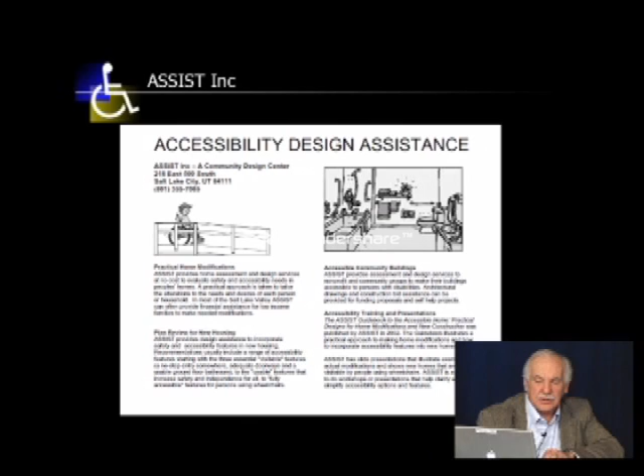We're in downtown Salt Lake. We run a number of programs. This is a description of our Accessibility Design Assistance Program, the Practical Home Modifications Plan Review for New Housing, consultation on community buildings, and trainings and presentations such as we're doing today. The other side of the flyer is in Spanish.

These are the building blocks that I think everyone should really be aware of if they're working to provide modification advice for people with disabilities. As probably most of you know, the standard code and safety require a foot of ramp for each inch of rise. So if you're up 24 inches to your front door sill, to your door threshold, you'll need 24 feet of ramp plus landing.

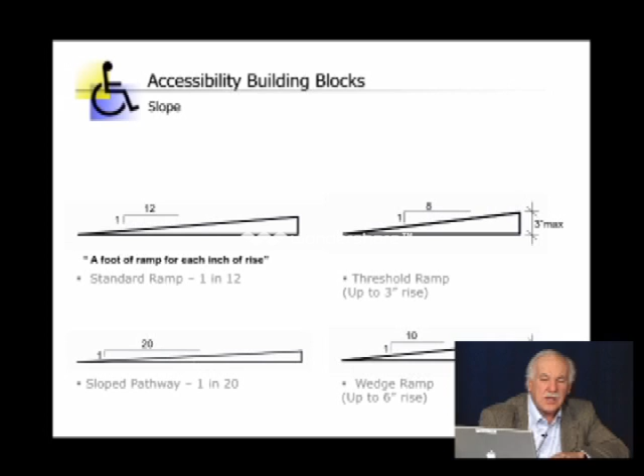There are situations where the rise is only 3 inches, where someone can manage a slightly steeper slope. And ideally, if you can do a 1 in 20 slope pathway, code doesn't require railings, and it's better for everybody, because there are some people that can't even do the 1 in 12. But that's probably the most important ratio to remember.

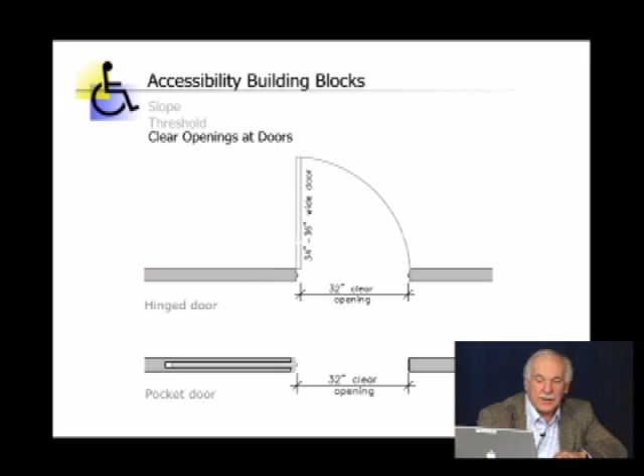It also relates to thresholds. For accessibility, a 1/4 inch maximum vertical, or a 1/2 inch with a beveled slope. Doorways require a 32-inch clear opening, and a regularly hinged door would have to be 34 to 36 inches wide to get that 32-inch clear opening. But more on that later that Melissa will show you.

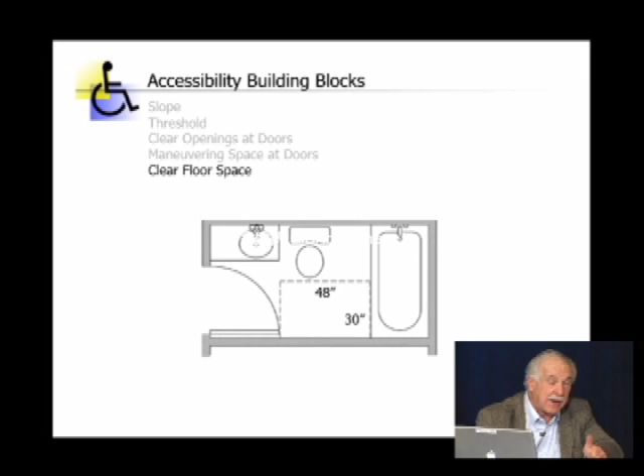These are just maneuvering spaces at doors so that you are out of the way as you swing the door open. These next two slides are really the most important dimensions, other than the ramp, that I think people need to know. Most people in a wheelchair occupy a clear floor space of 30 by 48 inches. A usable standard requires that clear floor space be by each fixture, each bathroom fixture, each kitchen fixture. A greater level of accessibility, you're probably familiar with as well, is the 60-inch diameter circle.

That is called the wheelchair turning space. The clear floor space is for when someone has to go in and back out because they might not be able to turn around. The 60-inch diameter allows you to make the full turnaround.

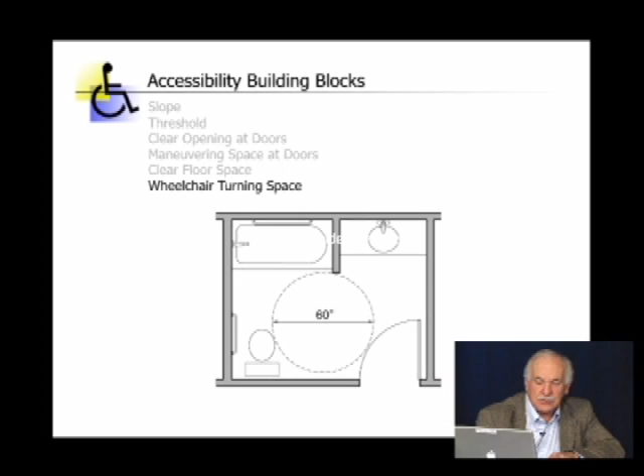Grab bar reinforcement - we're encouraging builders to put this in every home. A line of 2x10s reinforcing the wall around tubs and behind toilets. And while you're at it, bring it further so the towel bars can actually be built as grab bars. You can add grab bars that serve as towel bars along the long wall of the bathroom.

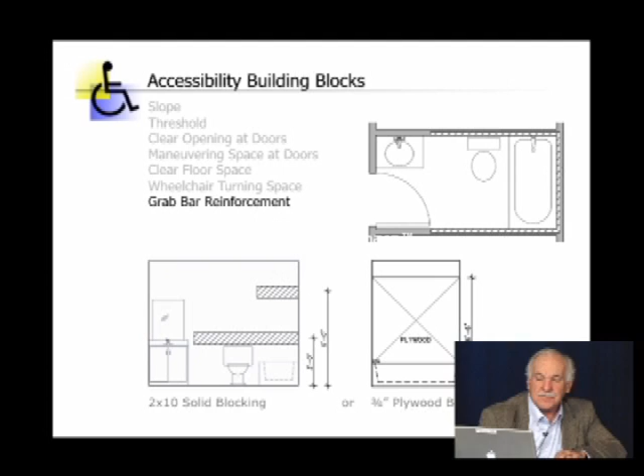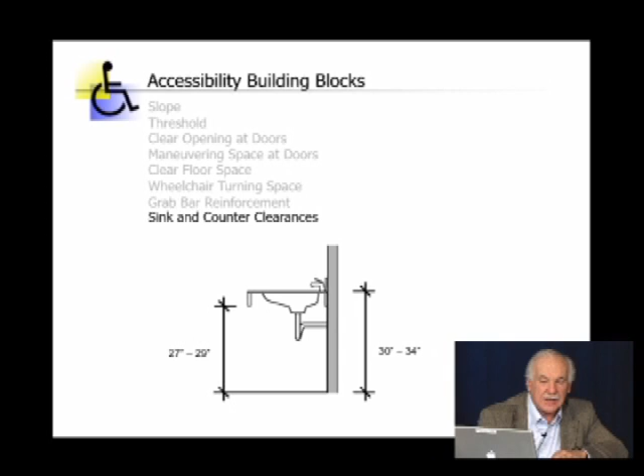Counters would typically be lower for someone in a wheelchair, and the knee space would provide 27 to 29 inches for most people in wheelchairs. Again, it has to be tailored to the particular people, and sometimes they're in a taller chair or there's a joystick that has to be accommodated. So just going to the code is not good enough.

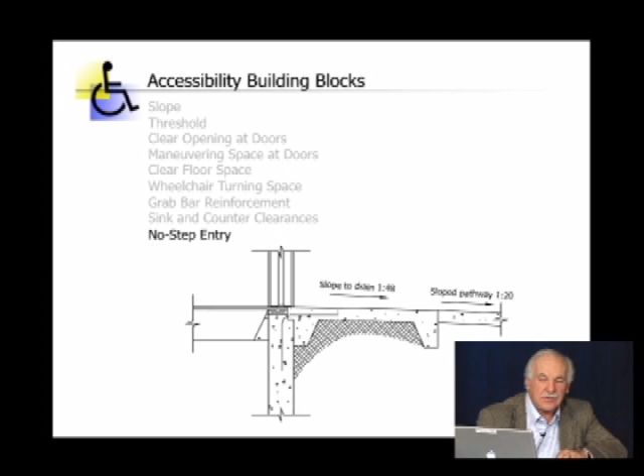And lastly, for the building blocks, I add this no-step entry framing. For those of you who know construction, this is probably the most important detail to create basic access in homes. We have more detail on this, but in talking to builders, it's a very critical piece.

And just to reiterate once again, the usable standard 30 by 48 clear floor space provides use or transfer of all fixtures, appliances, and counter, and the 60-inch diameter wheelchair turning space creates even more maneuverability.

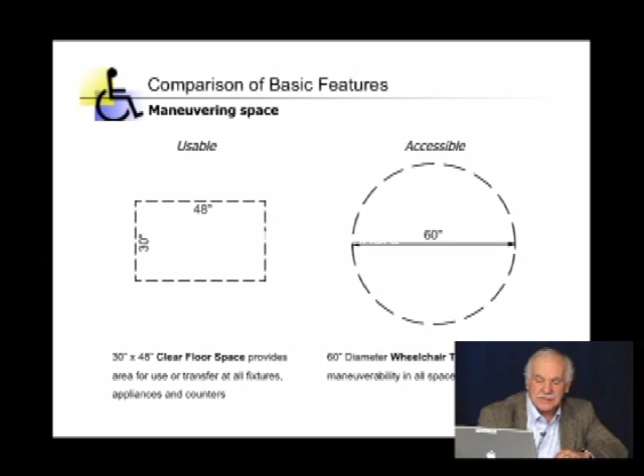And I'm going to turn it over to Melissa to start with the most basic access, which is entry into the home. The reason we start with basic access is that's usually the hardest problem to solve. After that come bathrooms, and we look at interior passageways through the home, and finally get into kitchens. So those are the four areas I'll be covering.

So we're going to start with ramps, because that's usually the first thing people think of about how to get someone in a chair into the house.

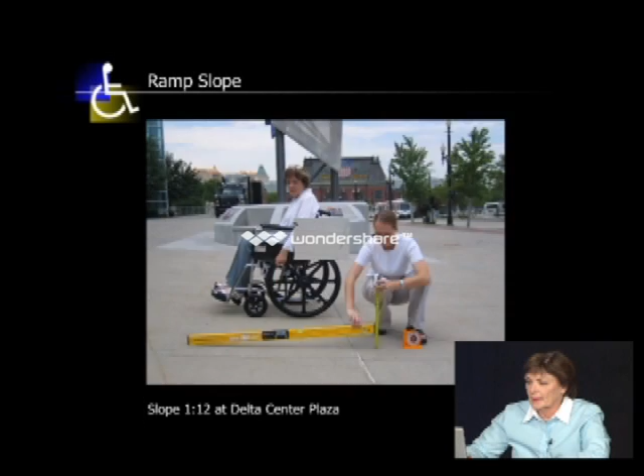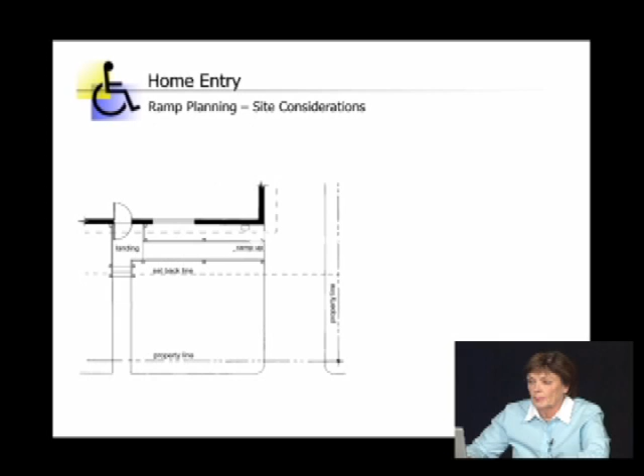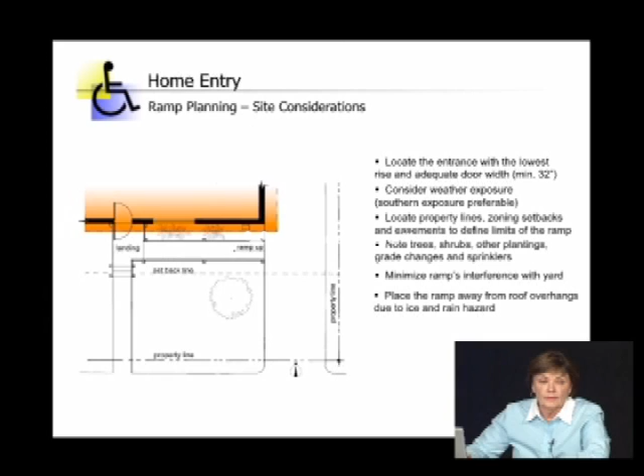So when we get to needing a ramp, the first thing is to figure out where it's going to be - where is there enough room, how long the ramp has to be. This just gives you, first we take a look at if it's going to be at the front door, what some of the considerations are, and I won't read all these. Just keep in mind setbacks, hose bibs, sprinkler systems - we sometimes forget about the sprinkler systems. So these are all things to be taken into account when you're thinking about how you're going to lay the ramp out.

Then once we get that done, we look at what the rise is. Frequently people will just measure it from the bottom of the step to the top of the porch, and that shows you exactly how much that is. But there's another step that gets forgotten - it's the step at the front door. So you add those two up and that will at least give you a ballpark figure of how much you need. But you also have to consider the slope on the front porch, because typically it's built to slope down to let water off.

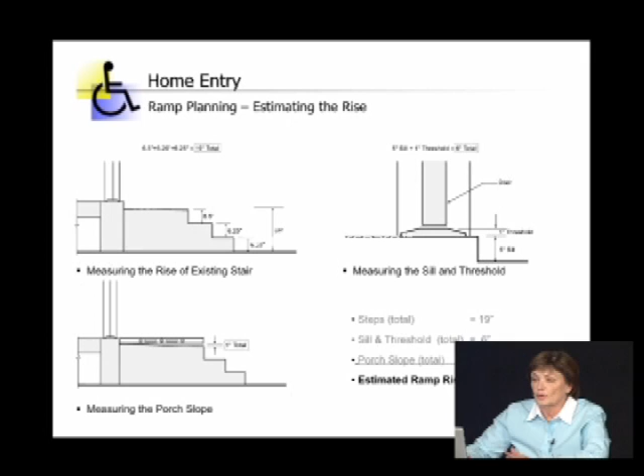So now we think it's going to be about 26 feet, and we think we've measured everything we need to. But there's still another step. Here is your 26-foot ramp. Now, in measuring a ramp, you really need to find out where the ramp is going to end, because that's really your starting point.

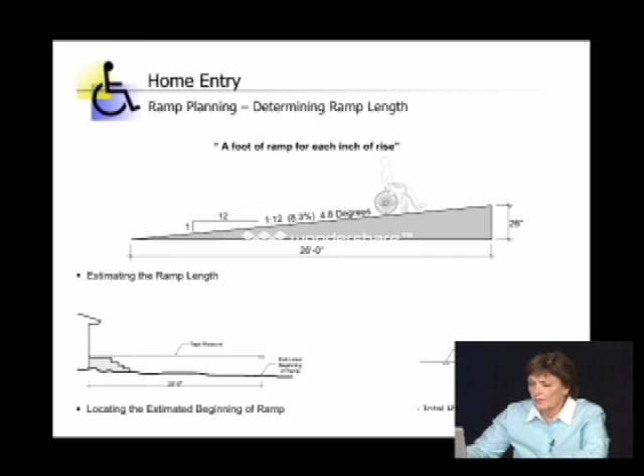You need to determine what the total drop is from the threshold to where the ramp is going to end, and we do that with a transit. You can also do it with a string level, measuring at the end of the line where the ramp starts. In this case it's a little different than our 26-foot estimate, because we've got a 2-inch slope going down.

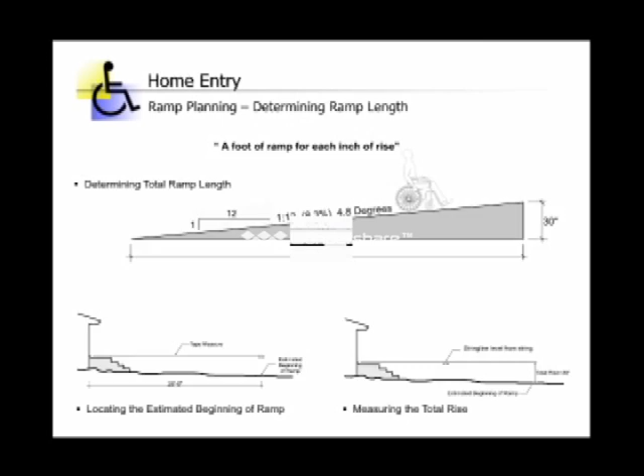And some examples of configurations. The most common one we use is the switchback, just to accommodate the length we need. It sounds like a lot of detail in laying out a ramp, but if you get the ramp too short, it's hard to go back and figure out how to make it long enough.

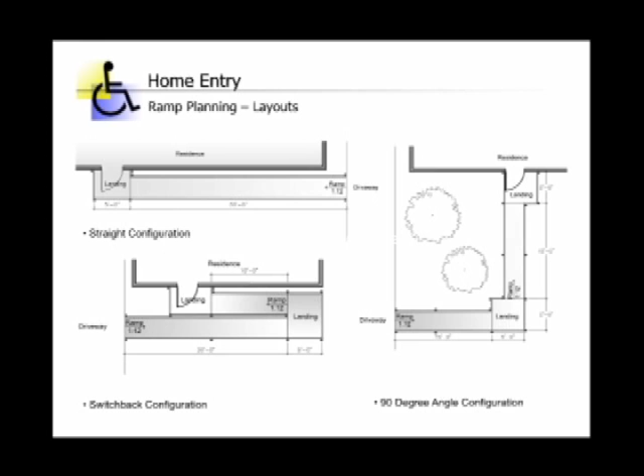We always say that we want to plan and design to the needs and desires of the individual. We obviously have code to meet, but it also has a lot to do with individual needs.

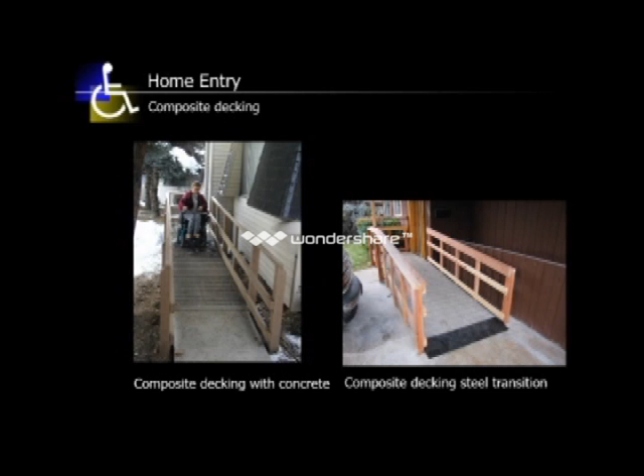Curved ramp, concrete up at the top, because it is a ramp up at that point. There are railings, and it's just one example of how it could be done to get into a home.

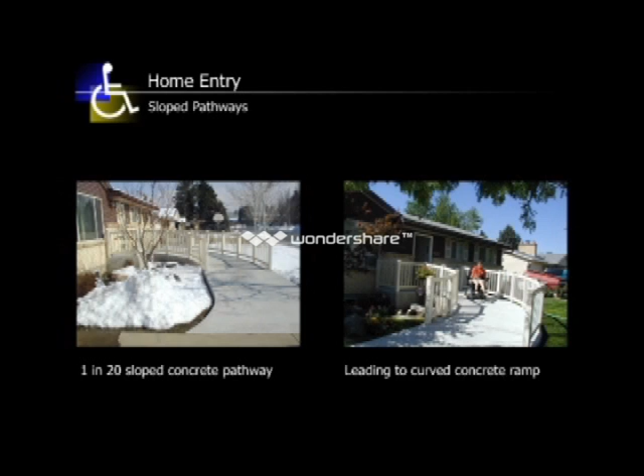This example, the individuals in the home came up with their own solution for getting someone in a chair into the house. From the front, it doesn't look any different than any other house, but if you notice on the side, you can unload someone from the car and it's ramped up to the front door. They just took part of the porch to build a ramp.

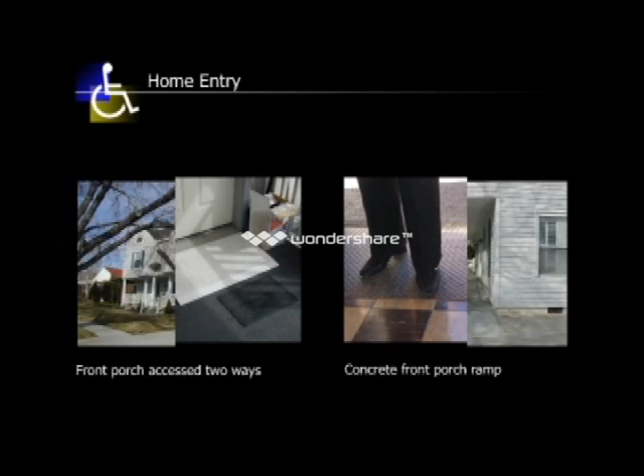Your typical garage is about 20 by 20, and people ask for a ramp in the garage to keep it out of weather - but they're going to lose a car space if they do that. There's just no way to fit a ramp and 2 cars in a standard garage.

These we are showing at 24 feet, and you can see that it provides opportunity to put a ramp in and still get the 2 cars in just by adding a few more feet.

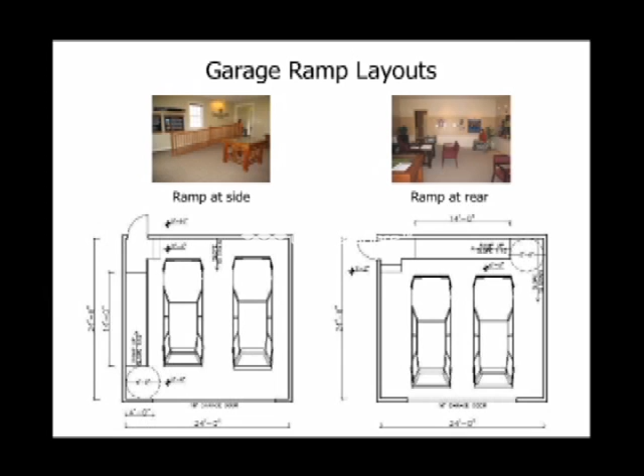If a ramp is not needed, and sometimes it's not, I get a lot of calls from people asking me to come out and help build a ramp to get out. I ask, are you in a chair full time? Do you walk at all? They say, well, I use my walker and my cane, but I can't do my steps. This is the alternative to doing a ramp.

For someone walking or using a walker, a ramp may not be the best solution because it will cant someone forward when they're going down. So we talk about low-rise steps, which are 4 inches high.

We need to find out what the person actually needs and what will make it safe for them. If neither of those solutions work, and it's up too high - typically once we get to a 36-inch rise or higher - the cost of a ramp starts equaling the cost of a porch lift, depending on the circumstances. These are just a couple of examples.

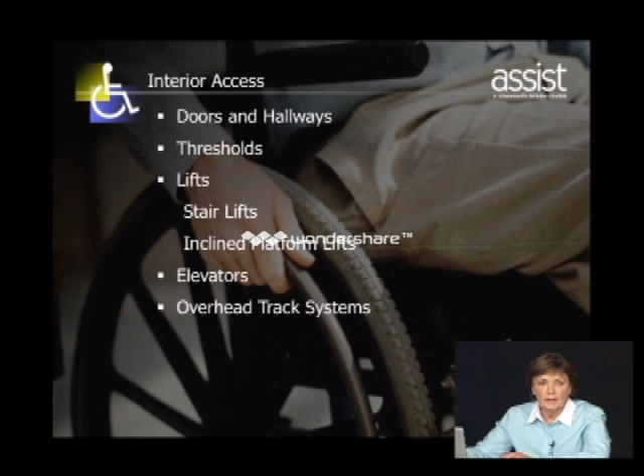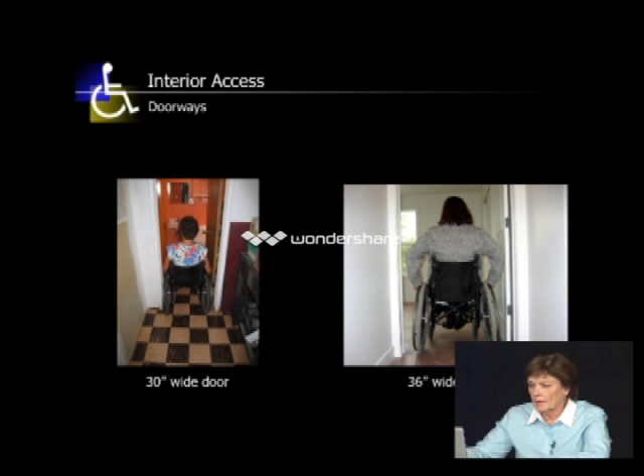In some cases, if people are going straight in, that's really all they need. It's just a question of changing out hinges, not tearing out the whole door. Now it doesn't always work, particularly with 28-inch doors, but sometimes with other doors it can.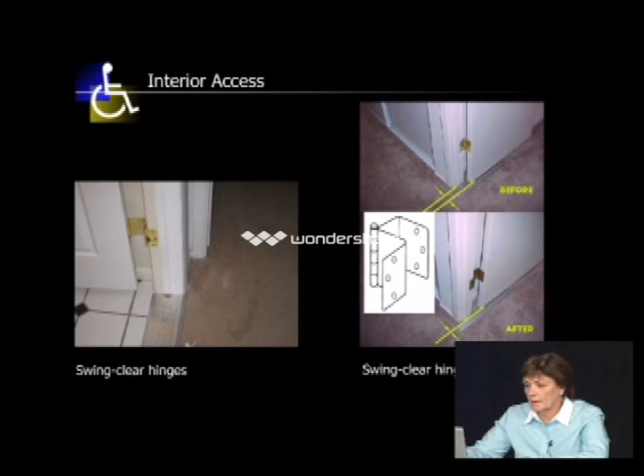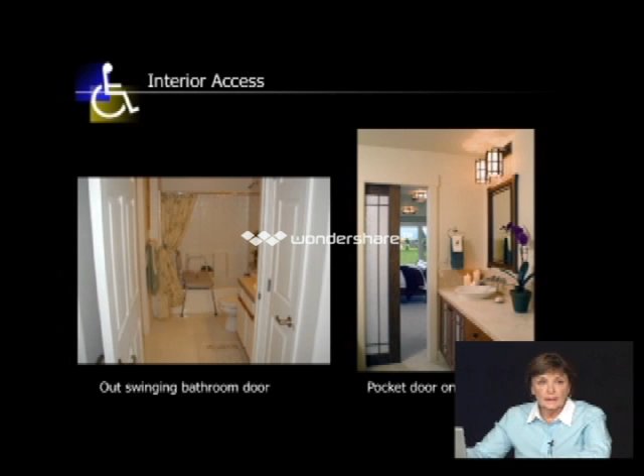You could do an out-swinging door on a bathroom. That's one option, for someone in a chair to be able to get in and close the door behind them. Your typical 5x8 bathroom doesn't allow for that - they can get in, but they can't close the door. The other slide is a picture of a pocket door, which is sometimes an option.

We're a great advocate of making hallways at least 6 inches wider, so you have a 42-inch hallway. Not only is it easier to maneuver through, it's easier to get furniture through, and it looks a lot more gracious than your typical 3-foot hallway that sometimes resembles a bowling alley. Chamfered corners are also a great idea for maneuvering.

One option for getting up and down the stairs is stair glides, and we are seeing more and more of those in people's homes. If someone has the ability to transfer from a chair at the bottom to the stair glide, get up to the top and get off onto another chair, this could really be a very good solution. They make them in all sorts of configurations now.

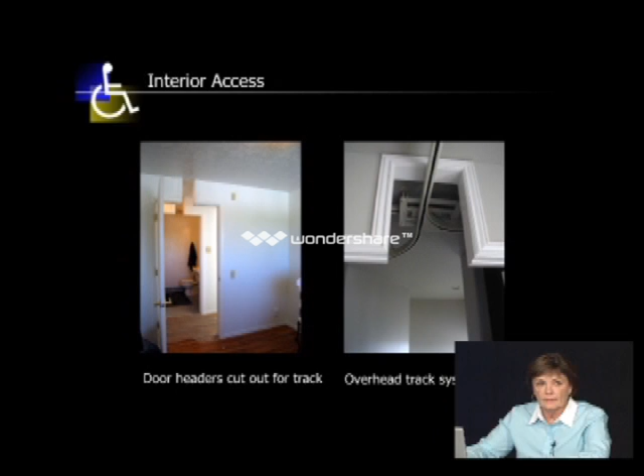And again, here they cut out the entire top of the door to put the curved track in.

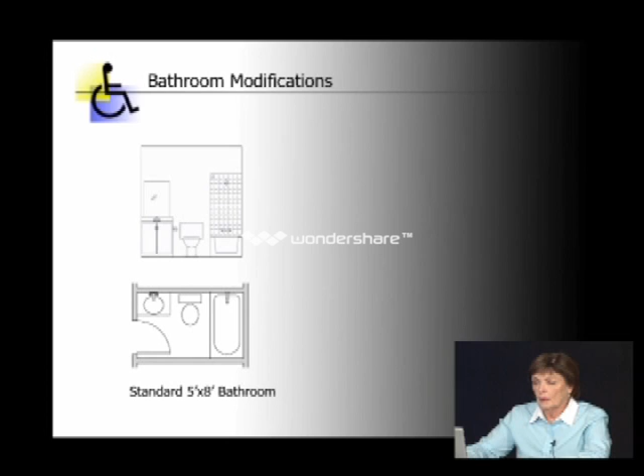Going into bathrooms is usually our second biggest issue. We start with the standard 5x8, which is what most homes have in the hallway. Master baths these days tend to be a lot bigger, but usually we're looking at the hall bath, which is 5x8 and doesn't give a lot of room to do anything.

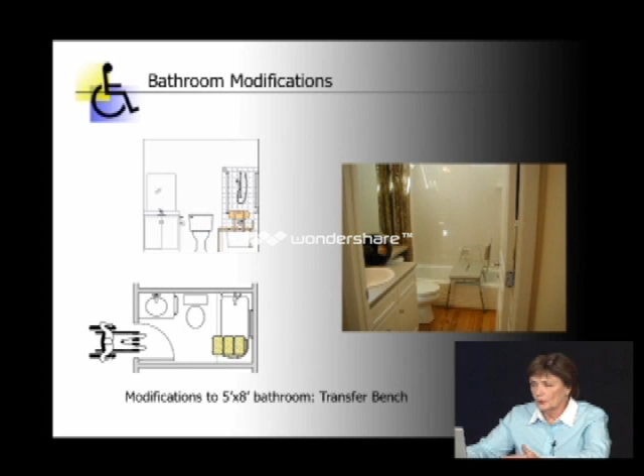So the first thing we suggest to people is, can you use a transfer bench and be able to sit down and either swing your legs over or have someone help you get in, and use a handheld shower so you're not really climbing in and out of the bottom of the tub.

If that's not an option, this is something we've started doing recently that's been extremely well received - doing a tub cut, where a portion of the tub is taken out and sealed up. You can no longer use it as a bathtub this way, but it provides a walk-in shower at a fraction of the cost and a fraction of the time.

I understand the manufacturer doing this now has an insert that they guarantee for life - you can put it back in, it will seal it up, and you can use it as a tub again. So like I said, this is probably a fourth of the cost of tearing out a tub and putting in a curb shower, and it can usually be done in about half a day.

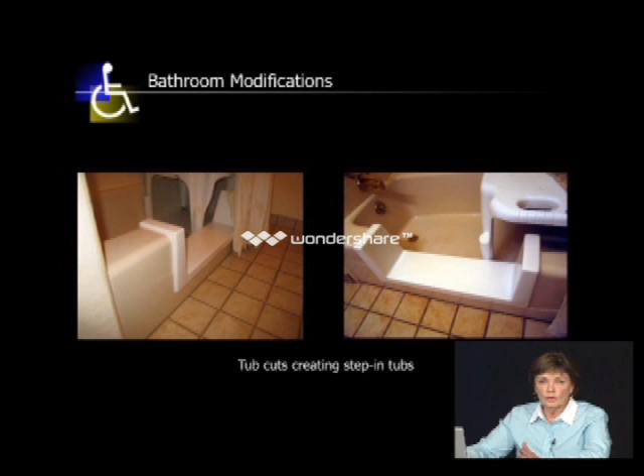If that's not an option, we go to number 3, which is actually taking out the tub and putting a curb shower in. You can see the different kinds of grab bars - there's a diagonal one to help someone sitting so they can use it going down and up again, a handheld shower, and this one has a number of grab bars, I think vertical ones on each side here.

When we do grab bars, if possible we have the person go in the bathroom, and they show us where they touch the wall - that's where we put the mark. I've had people ask what the normal height for grab bars is. If it's your own bathroom, it's wherever you need them, so we try to get them to figure out what would work for them. We put some up at 5 feet high, some at 2 feet low - I think the 5-foot one was for a guy who did exercises in the shower and wanted it up high, so that's what he needed and wanted, so that's where it went.

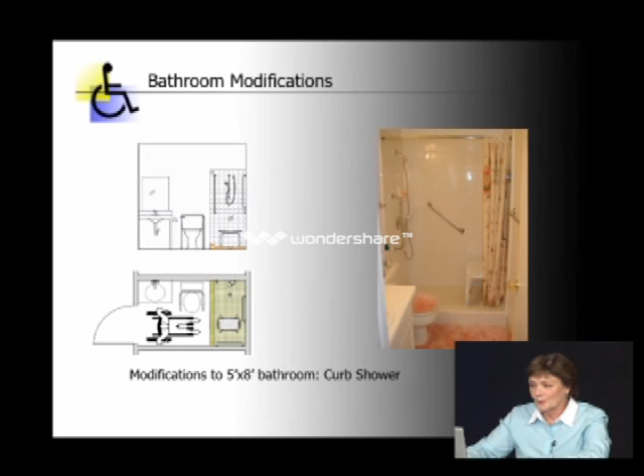Now we get to someone whose transferability is permanently in a chair and really does need a true roll-in shower - this is just one example. What's difficult about doing a roll-in shower in a retrofit, as many of you may know, is getting the drain down low enough. Your typical bathtub drain is going to be above the floor, but we usually need to get down a couple inches below the floor so the water will slope down the drain and not back up into the hallway or bedroom. So it can be done in some cases, but it certainly takes a bit more work.

And then once we've got that done, we use - can we go back? Where's the back?

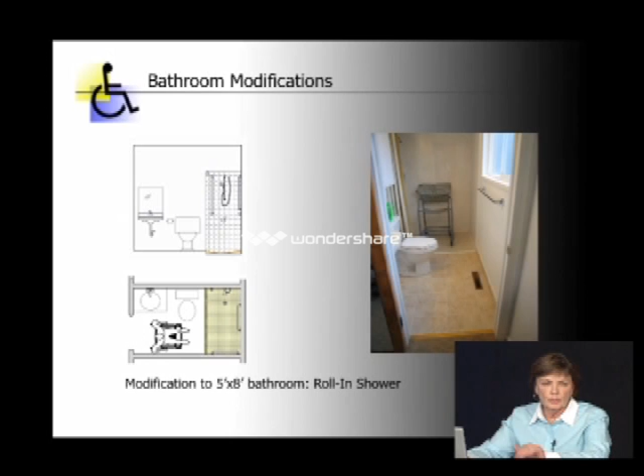There's a later picture showing how we use a marble transition threshold just to act as a small lip to keep the water in the shower and yet provide easy access into the shower itself.

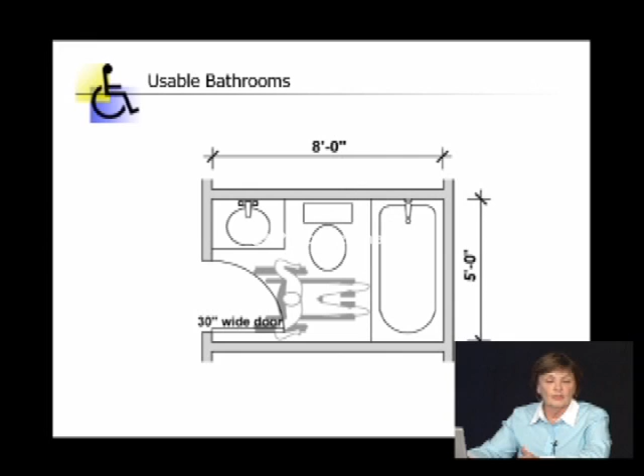This is one I really like. I think this would be a great idea if we could convince people it would not take much effort. Here's your standard 5x8 bathroom with a 30-inch wide, 2'6" door. You can see the person can get in, but they really can't go very far or do much else. By increasing the bathroom 18 inches, you can now have a 3-foot wide door, and the person using the 30x48 space can get in and shut the door. It provides a more spacious bathroom for a lot of people—mothers bathing 2 or 3 kids at a time, or just room for a laundry hamper. There's all sorts of reasons, but most important is so someone can get in and have some privacy.

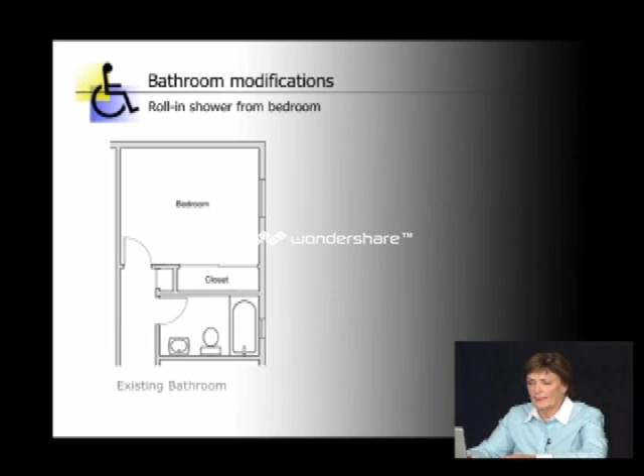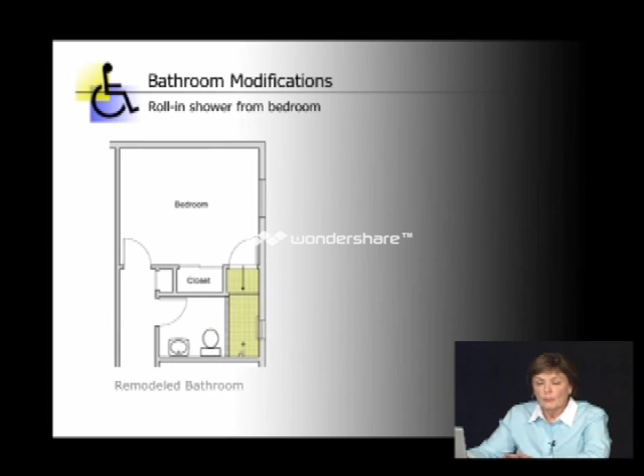This example is where we had a 5x8 bath. The house had pre-engineered joists, so we couldn't cut those to lower the drain—that wasn't an option. So we came up with this idea. This is the bedroom of the person with the disability, and the hall bath is the only bath on that floor, used by other family members. So we did a curb shower in there, your standard curb shower, but the way we achieved a roll-in shower for the individual...

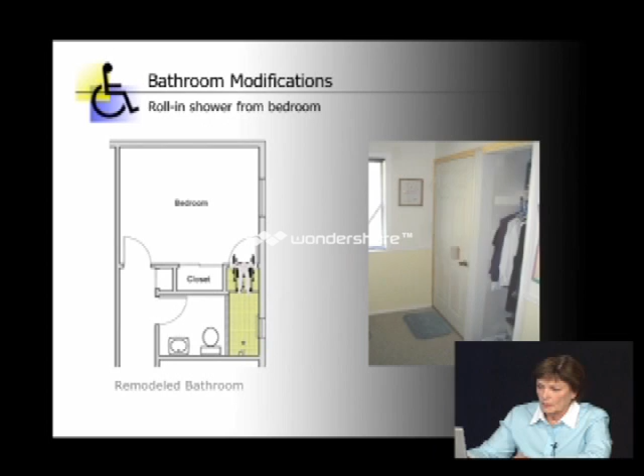...was to take part of the closet and build a 2-foot ramp to make up the 2 inches we needed. Here it shows from the bedroom—it does have a door on it. There's the door open, and you can see the ramp and marble threshold at the shower. From the bathroom side, it acts as a regular curb shower for the rest of the family, but for the person with the disability it becomes a standard roll-in shower.

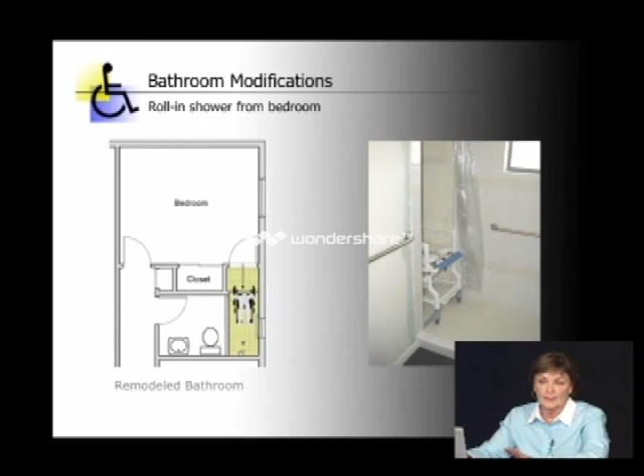The really good news, as the mother pointed out, is she now has a parking garage for the chair. When she's not using it, it sits there in the ramp behind the door. She thought that was a great idea we came up with, but we didn't even realize we had done that.

The question is, so what is the added cost, if any, of doing all of this? By all of this, do you mean a roll-in shower, modifying the bathroom? I guess it depends on the extent. If they're asking about a roll-in shower, typically that's probably $6,000 to $8,000, and that's only doing the shower, not anything else to the rest of the bathroom.

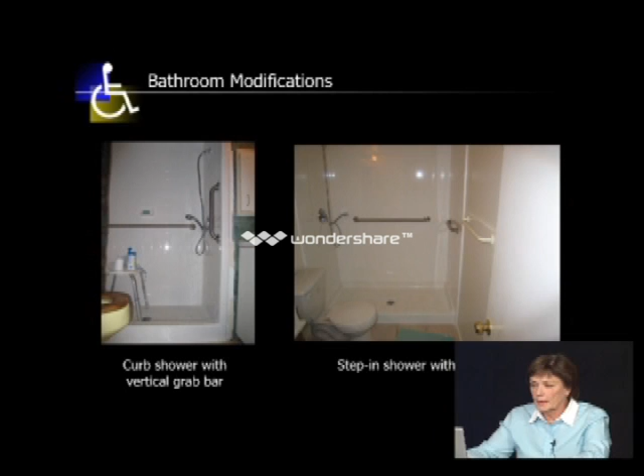More handheld showers and some examples of flooring. We try and be really careful about the surface of the flooring. This one has a pebbly surface that's fairly tight, so you hopefully will not get a lot of soap scum in there. Some people ask about bigger tile or rough tile. We just say be careful, because soap scum can build up and it will become too slick. So it's just something to be aware of.

We typically, as the other picture shows, use the 2x2 swimming pool tile, literally used around swimming pools because it has a nice rough surface. So if kids are running around a pool, they're less likely to slip. So we figured this was a safe choice for a shower.

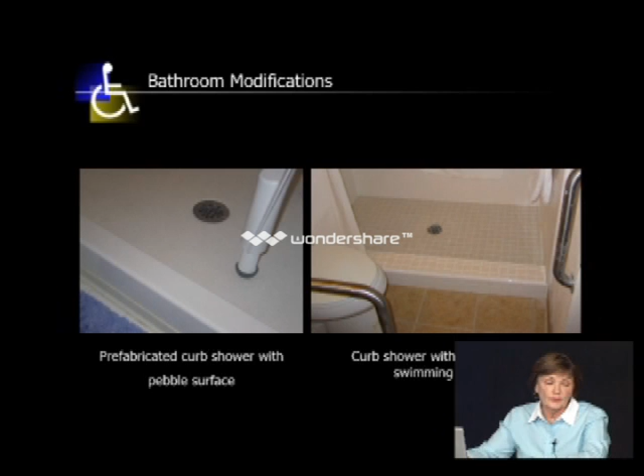Just more examples of the 2x2 tile in showers, and showing the sloped marble threshold.

And some examples of roll-under sinks. The one with the cabinets was done as a modification, and oftentimes people will do that. They'll take out the toe kick and the doors, the middle brace, insulate the pipes underneath, and then it can be a roll-under sink.

The other one, people ask about wall-hung sinks, which too often don't work because people may lean on them and it's hard to brace them. Or they'll ask about pedestal sinks. Pedestal sinks have gotten a little bit better about the pedestals, but oftentimes a person's feet will end up bumping the pedestal and they can't get close enough to the sink.

So what we found works best is to build a counter and put a drop-in sink in. Because we're in a corner there, we can brace it on one wall and then do a diagonal brace on the other end. The advantage of this over a pedestal sink is it will also give someone some counter space.

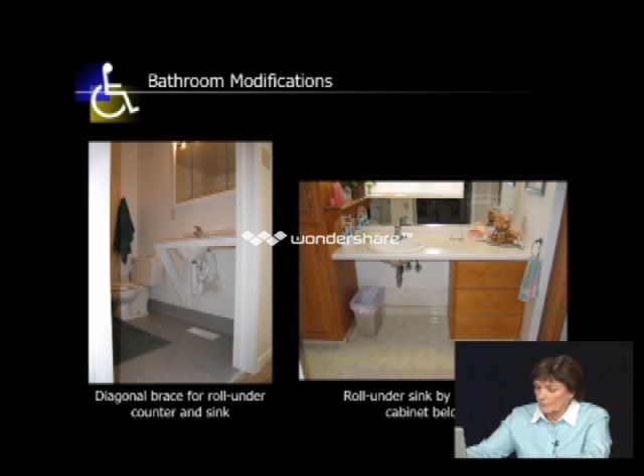And some more examples of retrofits. The woman on the right is not under a roll-under sink, but she needed an extra water supply for sanitation reasons in the bathroom. She just hooked it up to the back of the toilet, and she can get in there in her chair and do whatever needs to get done. It was very handy for her.

So people can come up with some really good ideas. They know what works best for them. And if you talk to them and get some ideas from them, then you may be able to help them find the best solution.

More examples of grab bars. There is what we call our swing-down or trumpet bar. I'm still not sure that's the right name, but that's what we call it. It's just so if someone needs it from the side or wants to get off toward the side, they've got something to hold on to.

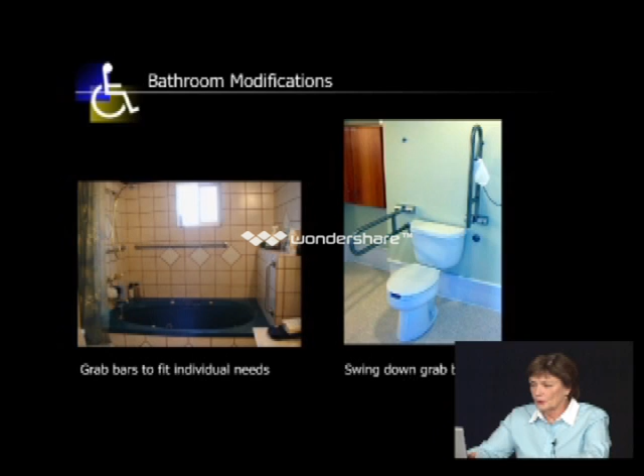And briefly, I'll go through some of the kitchen features to give everyone an idea of things that can be done. And while I'm here on flooring, if anyone, whether they're able-bodied or not, if you remodel, finish the floor under your sinks. Because if you ever want to change your sink out, even someday if you want to put a pedestal in for you, you don't have to change the flooring. And if you decide you want to do a roll-under sink, the flooring is already there. It costs a few dollars more at installation time, but it will make it easier farther down the road if there are changes coming.

Side-hinged oven doors, and I understand there's an American manufacturer coming out with this again. Frigidaire had one for a while, but I think they discontinued it. Cabinets with deep drawers - we're a great fan of breadboards.

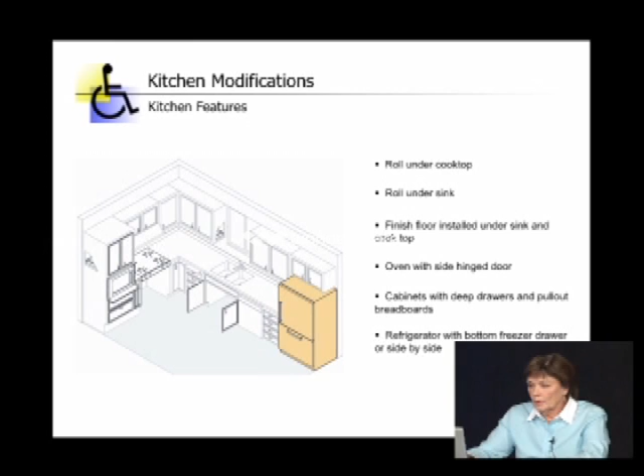Melissa, there's another question. Yes - where could someone get an oven that opens to the side?

I would tell them, if they want to call me - I don't remember the name, but I think it's Frigidaire, maybe coming out with a new one. You want to get on the internet and search side-hinged ovens, you will get some results. There's a couple of European ones that tend to be more common, but either get on the internet and search side-hinged, or if you want to give me a call, I can track that down for them.

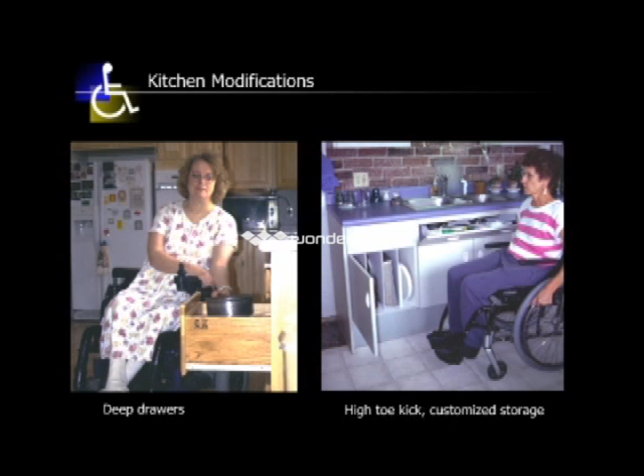And a shallow sink with the drain toward the back, smooth cooktop to slide off pans. And I think I'm going to turn it over to Roger. Okay.

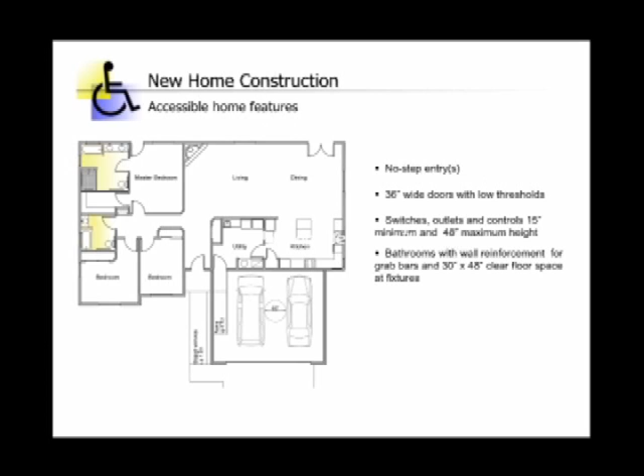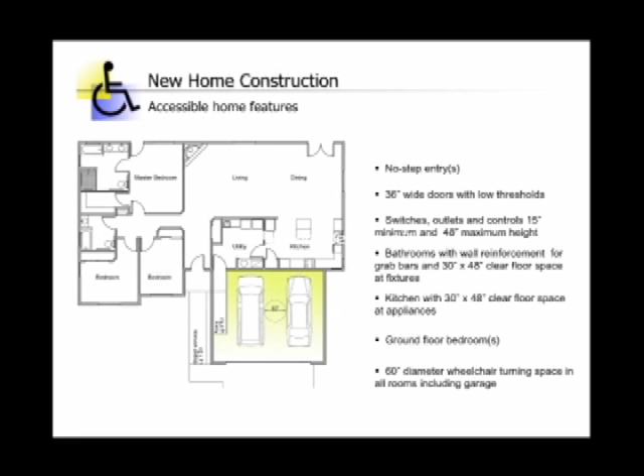I'm just going to talk a little bit about our work trying to encourage builders to build new homes with basic access features. This is a graphic that shows the basics of what you do. The most important, of course, is a no-step entry somewhere into the home, adequate doorways, switches and outlets at a reachable level, bathrooms with a 30 by 48 clear floor space, kitchens with the same, ground floor bedrooms for aging in place as well as people with infirmities or disabilities, and ideally a 60-inch diameter wheelchair turning space in all rooms. These are just a couple of the homes we have worked with.

This is a bermed slope pathway up to the front door for the young son who uses the wheelchair. The slope pathway, the house on the left, has a basement, and it's easily transitioned from the driveway to the front door. On the right is a house we retrofitted.

The porch used to be down 6 inches from the front door threshold, and we just raised the walk up and made sure that the earth got berm-ed up, so if someone wasn't a good driver in a chair, they wouldn't go off the edge. That's an important detail to remember.

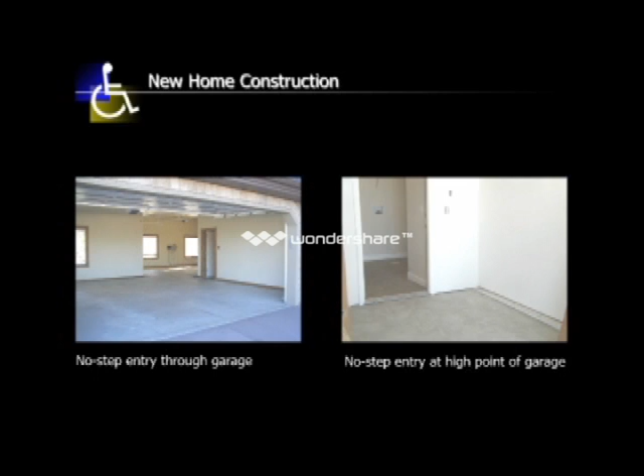Here are a couple of garages that don't even require ramps. You can see on the right, the floor of the garage slopes out by code to the garage door so that gases or liquids flow out of the house, not stay in or move in. Both of these have no-step entries from the garage, which is obviously very desirable in our winter climate.

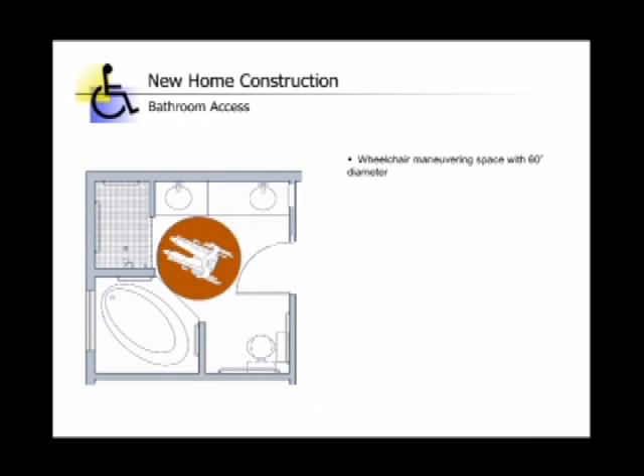What we would call our ideal bathroom has all of these features with a roll-in shower, turnaround space, lever handles and graspable controls, a toilet in a 5 by 5 corner that allows you to orient the toilet, the commode, one direction or the other. Some people might be able to transfer to the right, some could transfer to the left, and that allows you that option if you start from the beginning.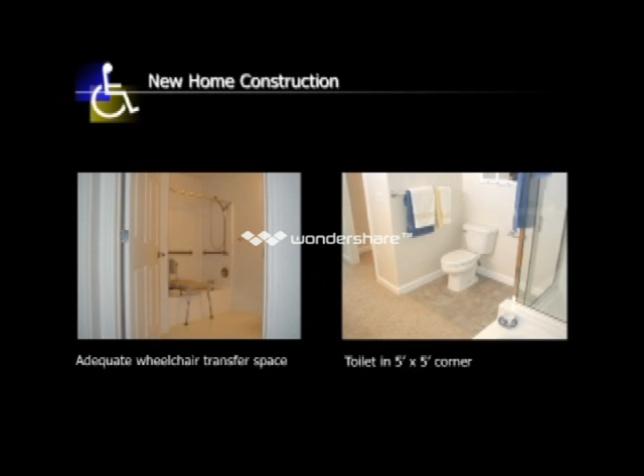Roger, yes, there's a question: what's the difference in cost of making the bathroom accessible from the start instead of spending $6,000 to $8,000 to remodel? Right, it's very minimal. If you look at builders in Georgia that are building the Easy Living certified home with accessible bathrooms, they figure building a home with basic access, a no-step entry, adequate doorways, and a usable ground floor bathroom is about a $500 difference.

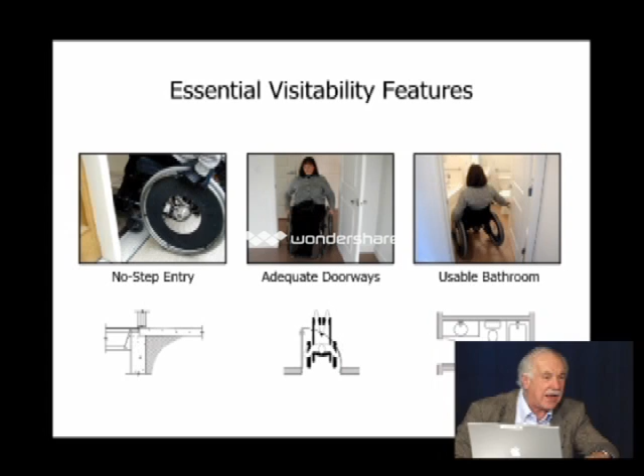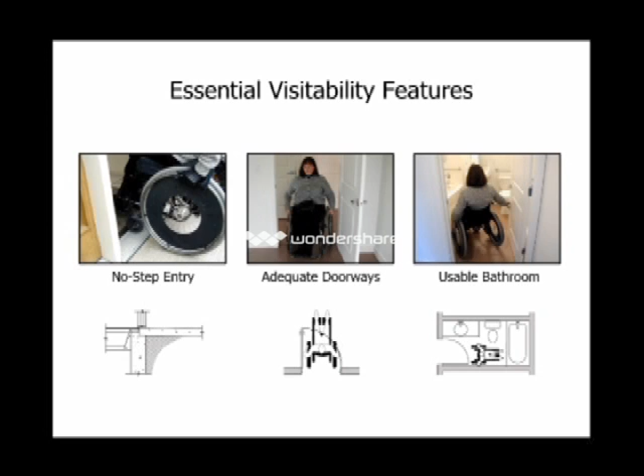This is a piece we did in conjunction with the woman who coined the phrase visitability, a wonderful woman who lives in Atlanta, and we presented this flyer to every builder, architect, mayor, and planning commission in the state about 5 years ago to say if we could just add the essential visitability features - a no-step entry somewhere into the home, adequate doorways, a usable ground floor bathroom - we'd have 90% of our problems done, because 90% of the problems we're presented with are how do I get in, how do I get through the passage doorways, and how do I function safely in the bathroom. And we point out, and I think this is a big marketing technique we have yet to master, that it's good for everybody.

It's good for parents with baby buggies, it's good for seniors using a walker or a cane, it's good for moving furniture, and of course it's good for family to visit your home independently. I remember as a child having to be home when one of my parents' good friends who had polio would visit - my brother and I would have to stay home for the beginning of the party, which was always fun, to help carry her into the home. But if we have a no-step entry somewhere into the home, people can do it independently and with dignity. And of course, the middle picture at the bottom, the fellow in a wheelchair, his home is accessible because he lives there. But the fact that his friend's home is visitable means he can join the party. And that's a big deal.

So we have shown the no-step entry either through the front door or just by grading it. There's a slab, a house built on slab, which is very easy to do, or again, that no-step entry from the garage.

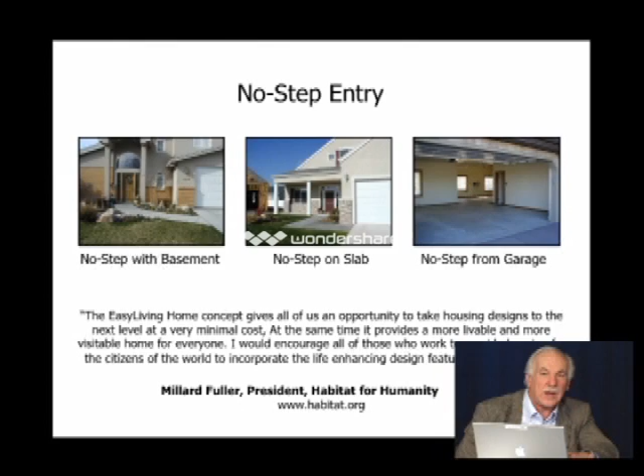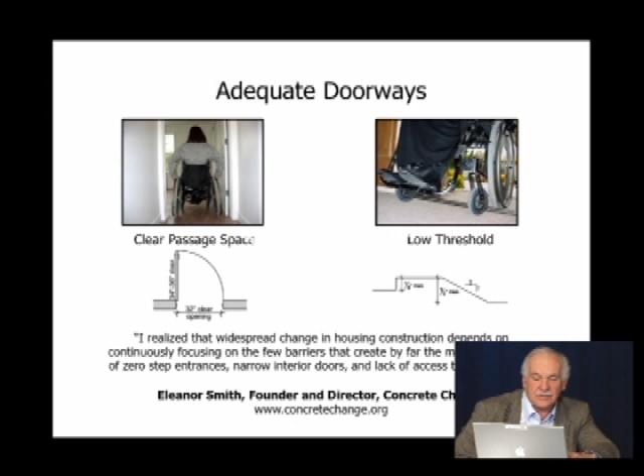And Habitat for Humanity has embraced this concept of visitability that I mentioned before - it's called the Easy Living Home. That allows people with disabilities, allows aging in place, a lot of different ways that people have described that - the clear passage space we talked about again, the 32-inch clear doorways and low thresholds. And there's a quote from Eleanor Smith, my friend in Atlanta, who said she wanted to focus on the few barriers that create the most harm. That is the lack of zero-step entrances, narrow interior doorways, and the lack of access to a usable bathroom. Again, the 5 by 9.5 bathroom providing that kind of access.

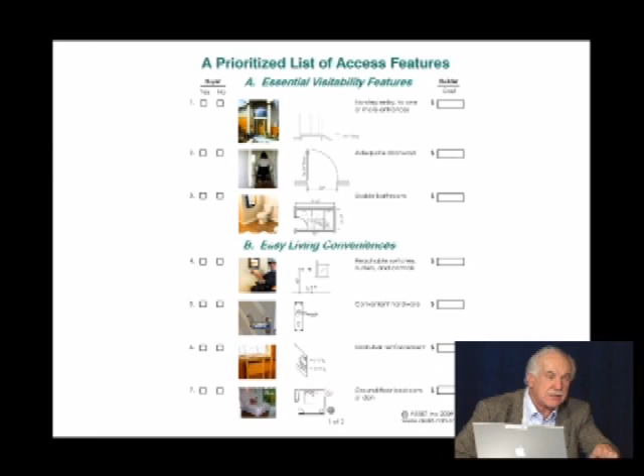And then this is our latest piece of work. I would like feedback on it from anyone who has ideas and a relationship with builders. We've put together a prioritized list of access features - it's kind of the ABCs of access. You'll recognize the 3 essential visitability features at the top. This might be a checklist that a builder would give to a buyer and say, yes, I do want a no-step entry somewhere to the home - it'd be great from the garage, for carrying in groceries. Yes, I want adequate doorways, or no, I don't want adequate doorways.

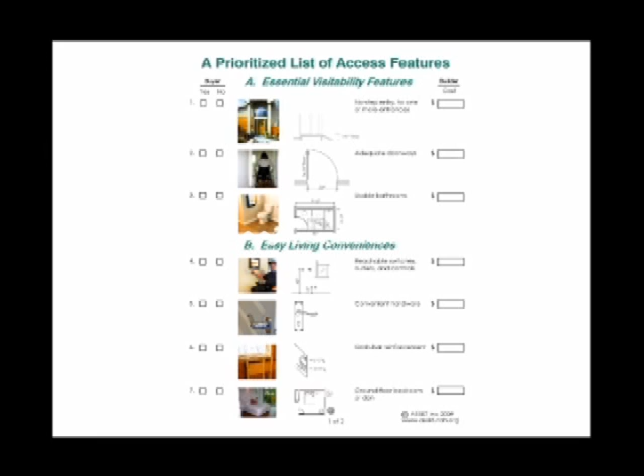And then the easy living conveniences are easy to do - lever handles instead of round handles, grab bar reinforcements, reachable switches, these are all easy to do. And then the third category, the C category, is where you get into the adaptations and upgrades - the wider hallways, the grab bars actually installed. Some of these photos are fuzzy and will be reworked, but this is the piece we're trying to get to builders, to offer these features as an option to all their buyers.

Stair glides, no-step outdoor living, things like that. We will probably have this in production on our website in the next few months, but we're really trying to work with marketers so this will be an option that builders would hopefully offer to all their potential buyers, young, old, or what have you.

It's always fun to look at mistakes. I think I learn a lot from my mistakes and from others.

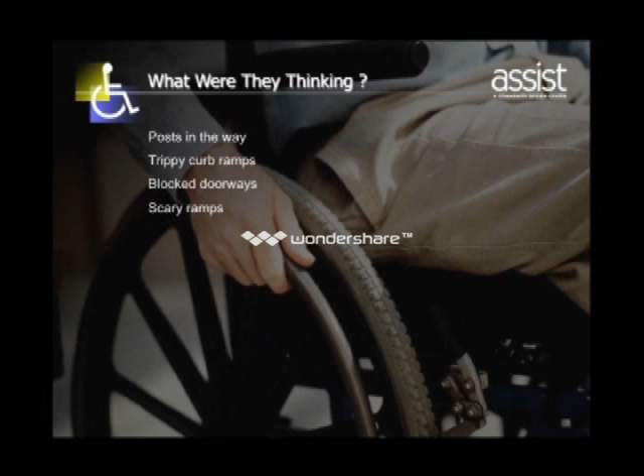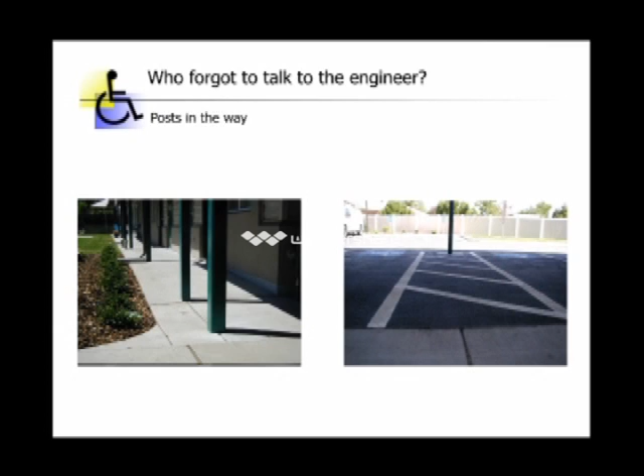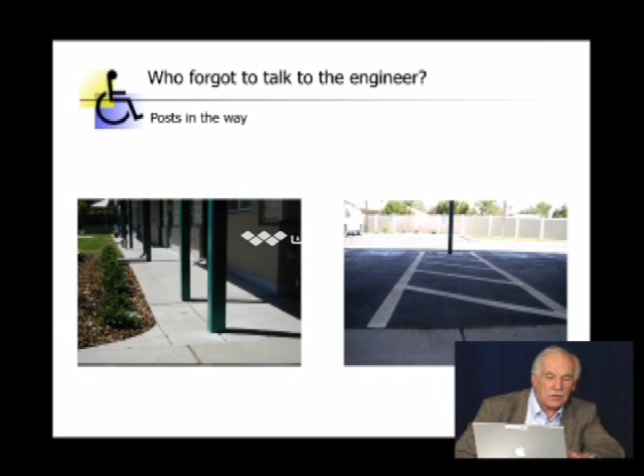As unbelievable as it is, this was 16 units of accessible housing built in Salt Lake County. I won't name names or places, but these are all accessible units for people with disabilities. I don't know if they didn't talk to the engineer, but they put the posts right where people would need to circulate. You can see the curved angle between the walkways, which is right for people in chairs, but of course there are columns in the way.

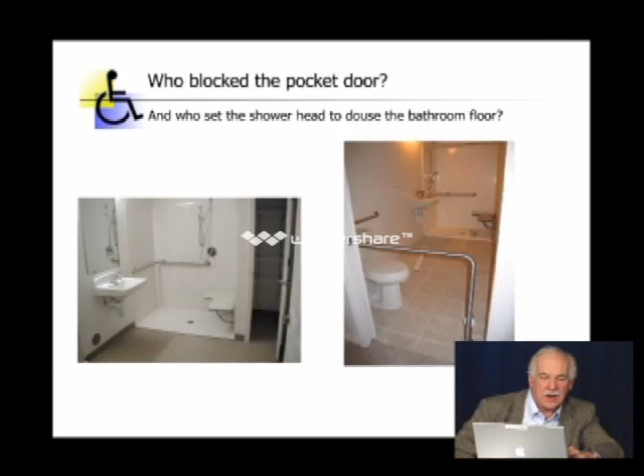And once again, just to reiterate, when a neighbor says 'oh, we can just go from the porch to the driveway,' often that is more dangerous than not doing anything at all.

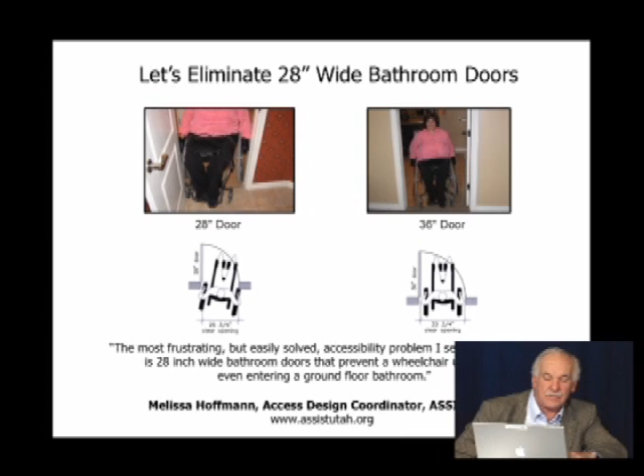Our last slide before our information: we're trying to get builders to eliminate 28-inch wide bathroom doors, because the difference between being able to get through or not is at least a 30-inch door. If you have a 30-inch door and put on swing clear hinges, you can go through if you ride your knuckles in.

So here's our information. Myself and Melissa, our phone number, our website is assistutah.org. We have copies of the Assist Guidebook to the Accessible Home, and we're happy to send out complimentary copies to anyone who could use them. We have multiple copies of the Visitability flyer, and always like feedback on whatever we've done.

And just to add on to the book, we send it out at no cost. If you missed anything today, everything we know is in this book. That's what we tell people. So all you have to do is look at the book, or call us, and we're happy to send you a copy.

With one exception, the tub cut we discovered last year. Everything we've talked about today is in the guidebook except for this tub cut idea, which has turned out to be about a $1,200 to $1,400 fix versus a $4,000 to $5,000 fix, and has worked well for people. There's a company in Murray, Utah that we've developed a contracting relationship with, and people have been very happy with that.